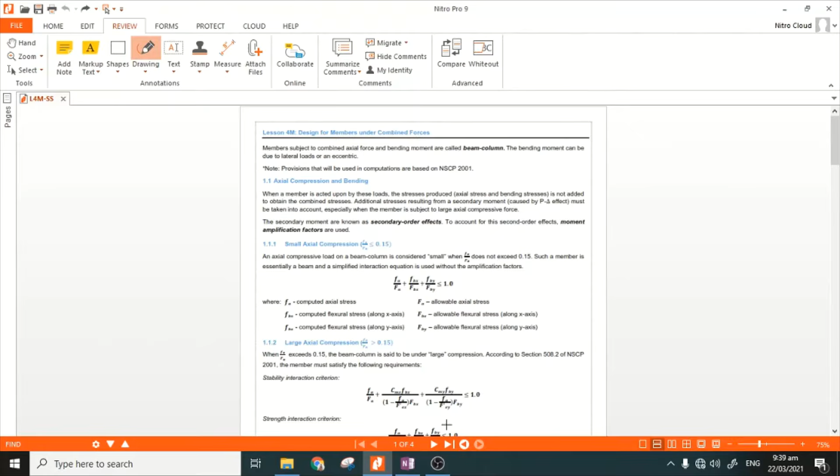Today I will discuss the design for members under combined forces. Members subject to combined axial force and bending moment are called beam columns.

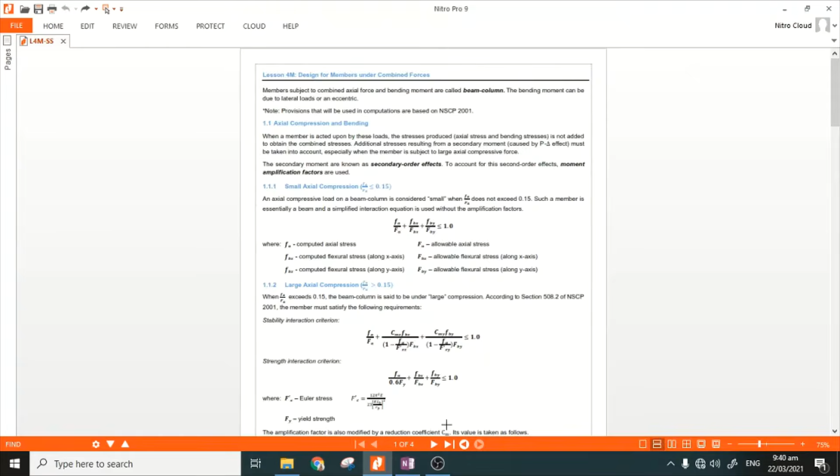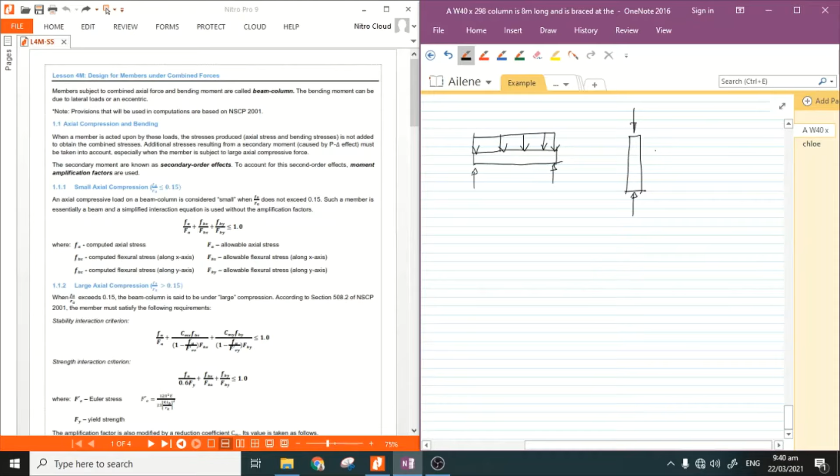As we know, we consider our structure as a beam when its purpose is to resist transverse loading, wherein that transverse loading causes the member to have bending moment and bending stress. And when the structure resists axial force, like compressive force, we call that structure a column.

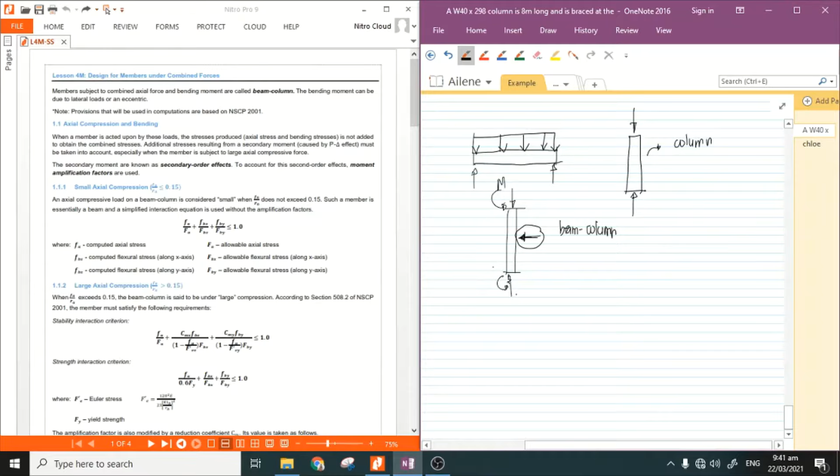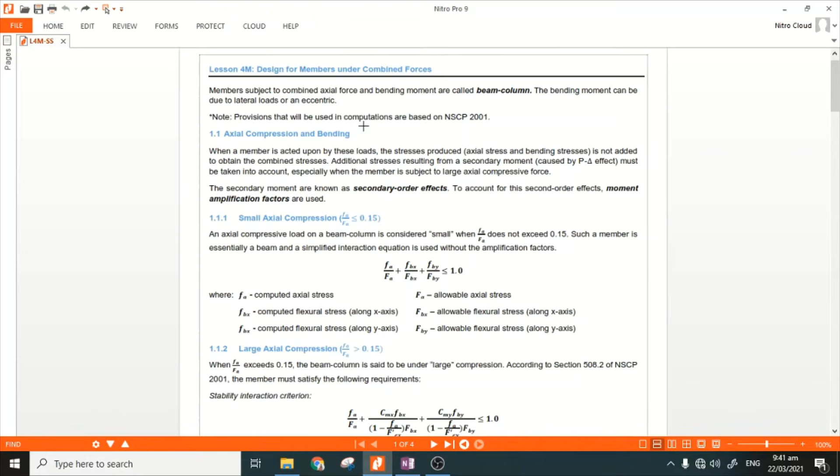The provisions we will use here are based on NSCP 2001. Let's start with axial compression and bending.

When a member is acted upon by these loads, the stresses produced—axial stress and bending stress—are not simply added to obtain the combined stress. Additional stresses resulting from a secondary moment caused by the P-delta effect must be taken into account, especially when the member is subject to large axial compressive force.

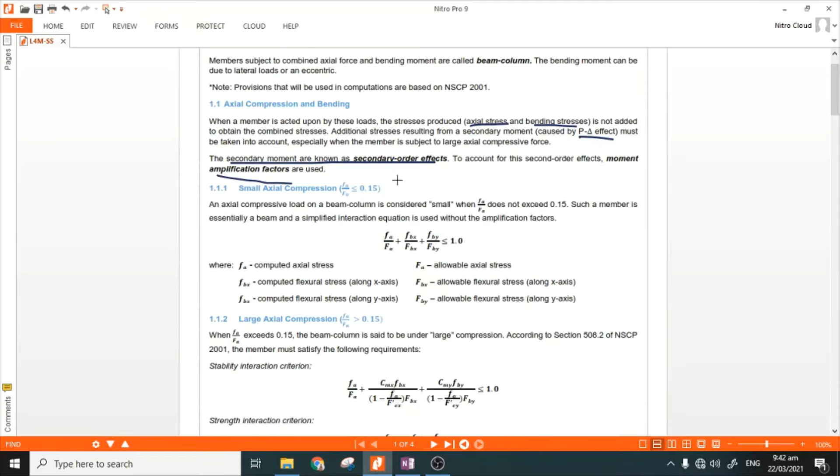So we don't just simply add the axial stress and the bending stress. We need to consider amplification factors to take into account the secondary moments.

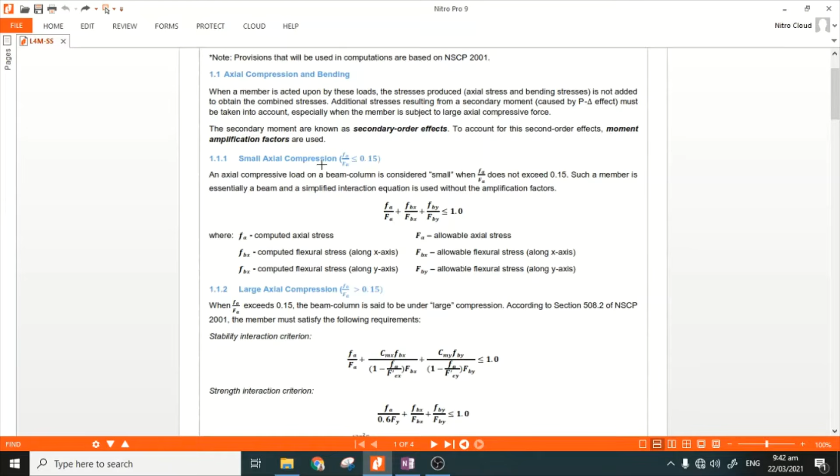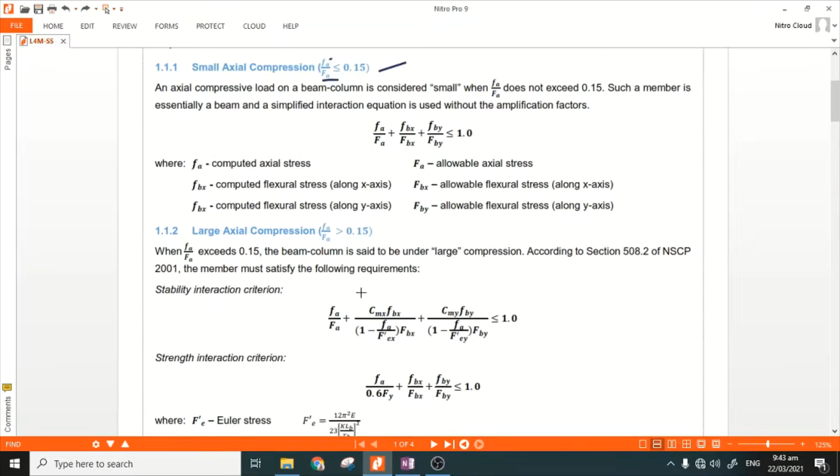We have two conditions here. First is the so-called small axial compression. We consider it small axial compression when the actual axial stress over the allowable axial stress is less than or equal to 0.15. That falls under this provision. However, if it's greater than 0.15, it falls under the other provision.

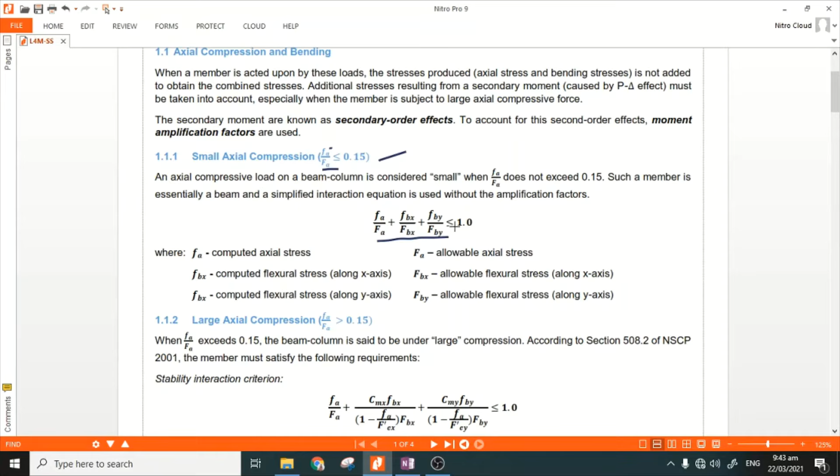Now for large axial compression, we have two criteria. The first criterion is the stability interaction criterion. Here is its formula.

If you notice, we now have additional variables: C sub mx and C sub my, and then F prime ex and F prime ey.

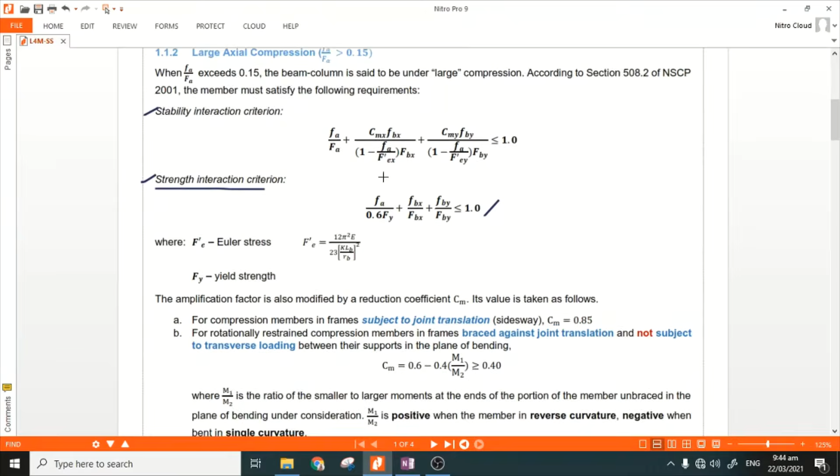And then for the strength interaction criterion, there is no C sub m, the reduction factor. So C sub m is called the amplification factor or the reduction coefficient.

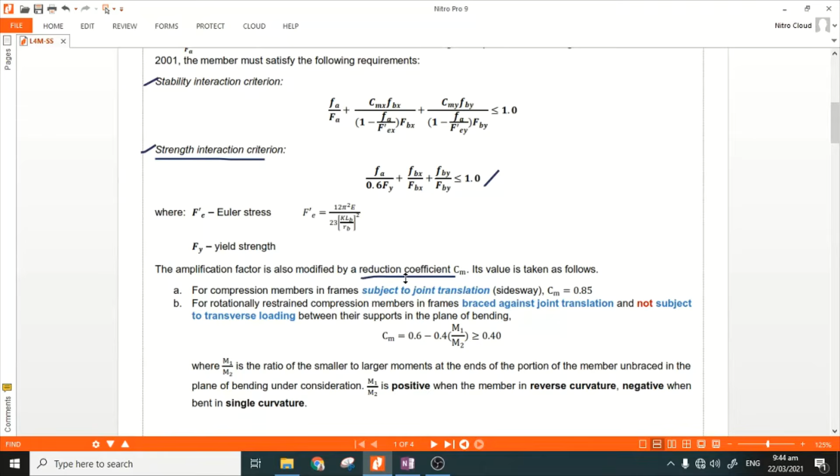These are the conditions—there are a few of them. There are three conditions for determining which value to use for the amplification factor. First, for compression members in frames subject to joint translation, C sub m is equal to 0.85. This means if your frame does not restrain the side sway, C sub m will be equal to 0.85.

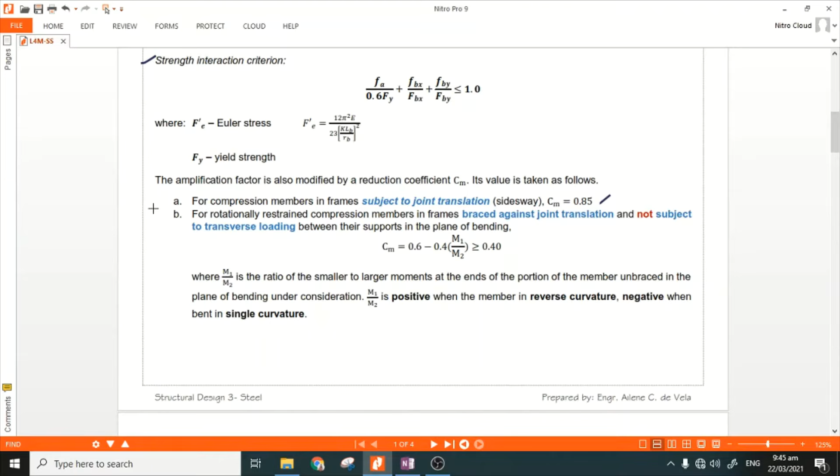Second condition: for rotationally restrained compression members in frames braced against joint translation—meaning it has bracing—but not subject to transverse loading, meaning it has no lateral loads.

C sub m is equal to 0.6 minus 0.4 multiplied by M sub 1 over M sub 2, and this value should be greater than or equal to 0.4, where M sub 1 over M sub 2 is the ratio of the smaller to larger moments at the ends of the portion of the member unbraced in the plane of bending under consideration.

This means the ratio you get will always be less than 1, since the numerator is the smaller moment and the denominator is the larger moment.

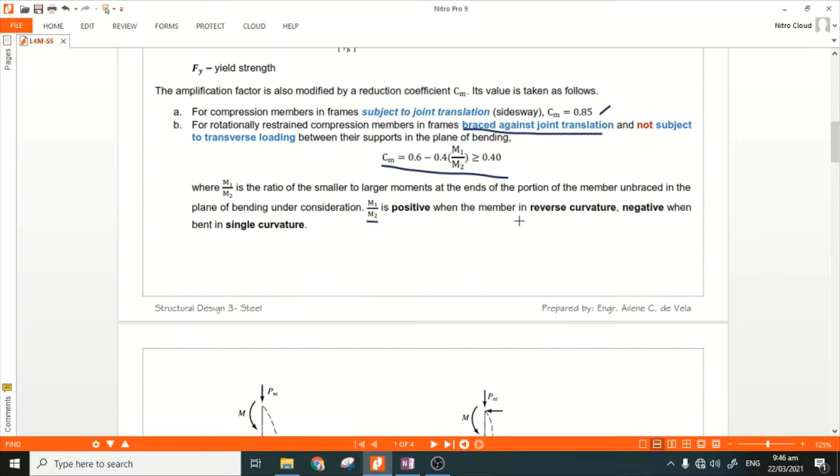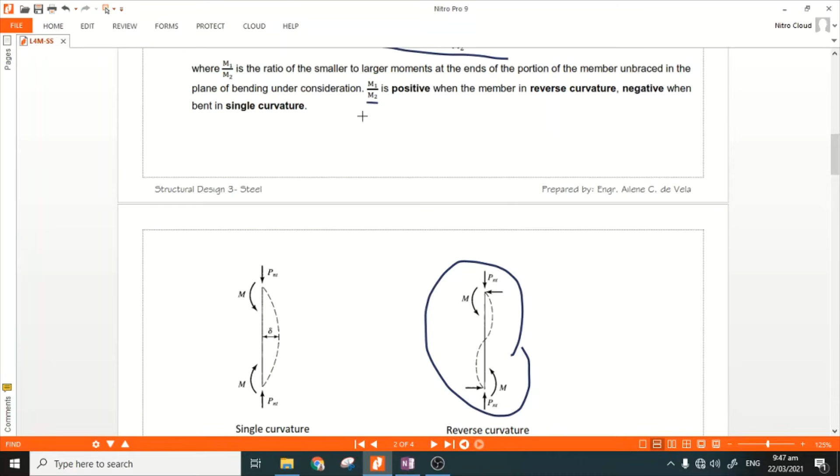M sub 1 over M sub 2 is positive when the member is in reverse curvature, like this shape of bending. It is negative when bent in single curvature. So when does single curvature and reverse curvature happen?

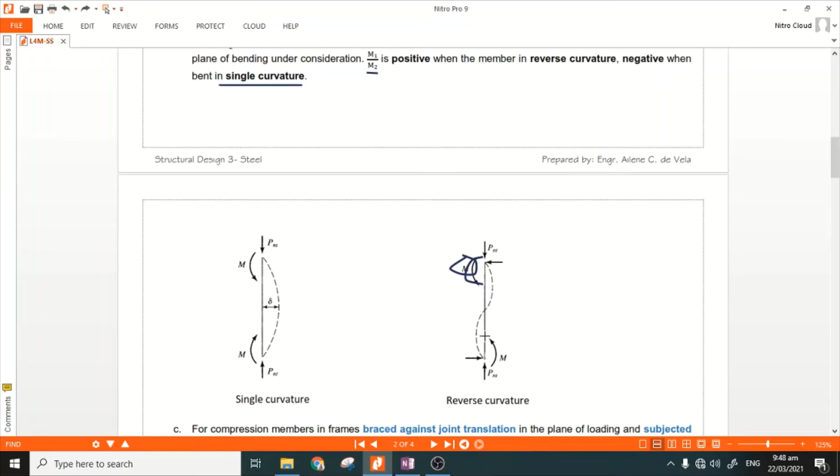For the third condition, it's still braced against translation, but now subjected to transverse loading between its supports. For members whose ends are restrained against rotation in the plane of bending, C sub m is equal to 0.85. When unrestrained against rotation, C sub m is automatically equal to 1.

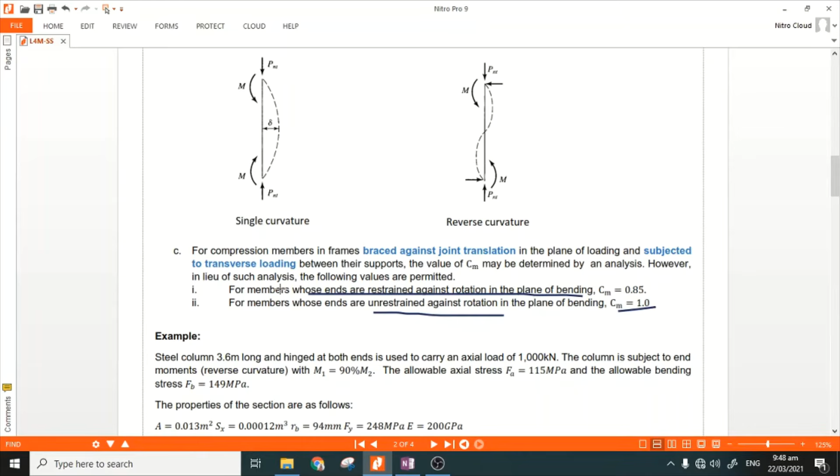Let's proceed to the example. A steel column 3.6 meters long, hinged at both ends, is used to carry an axial load of 1,000 kilonewtons. So we have a column hinged at both ends.

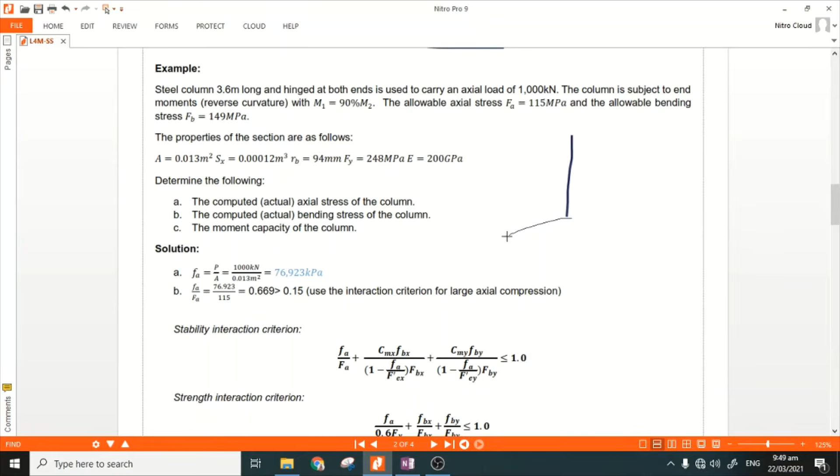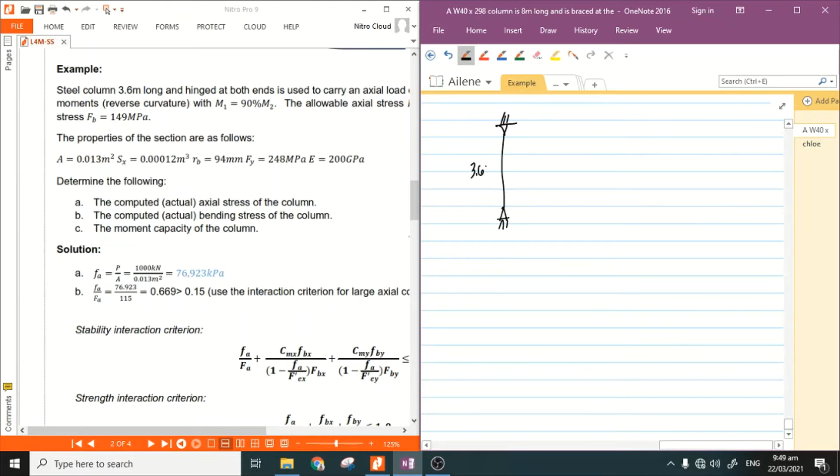And then 3.6 meters long. Tapos sabi dito, meron siyang axial load na 1,000 kilonewton. And then the column is subject to end moments, a reverse curvature with M1 is equal to

0.9, di ba yung 90% daw ng M2. Therefore, kung kukunin natin yung ratio ng M1 to M2, this is 0.9 M2 over M2. So, yung ratio niya is 0.9. So, mamaya magamit natin yan.

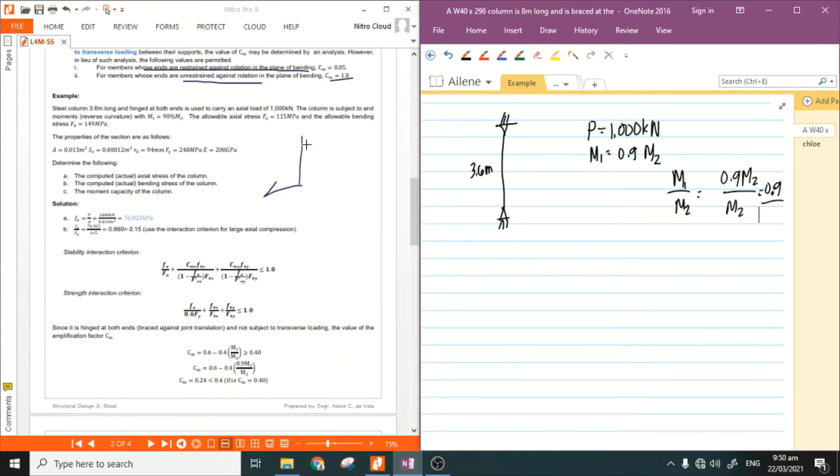The allowable axial stress, given na rin yung F sub A is equal to 115 MPa and the allowable bending stress is equal to 149 megapascal. So, both axes na to for X and Y axis.

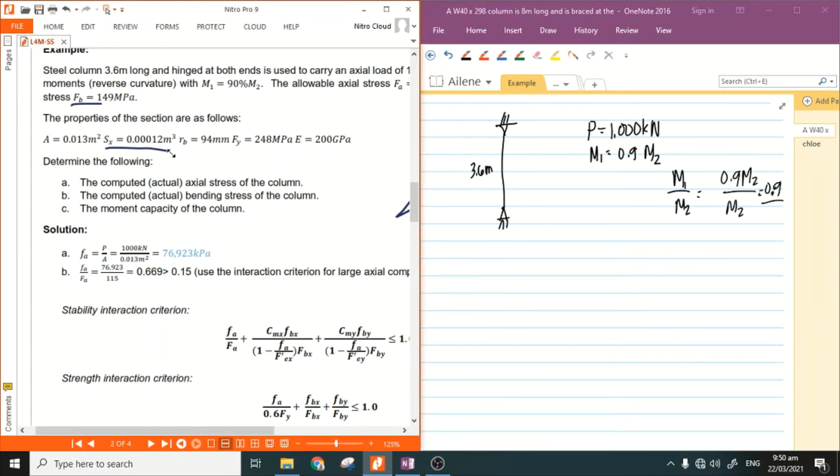The properties of the section are as follows. So, given na din yung area and then the section modulus, the radius of gyration, and the yield strength and modulus of elasticity.

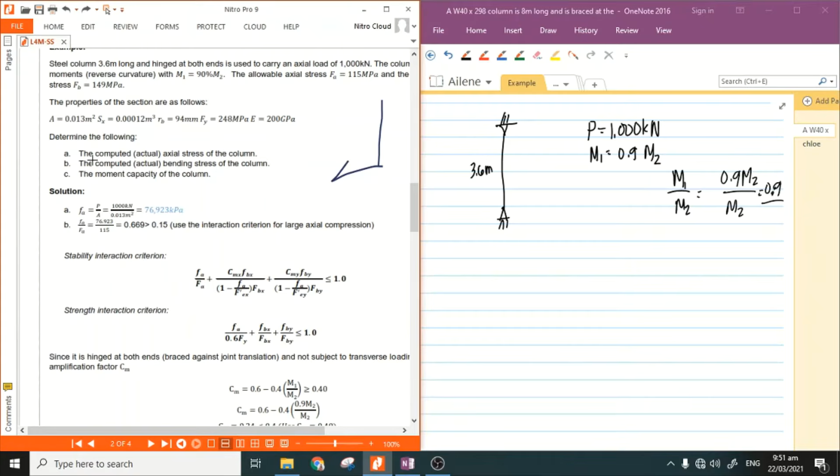So, ang tanong, determine the following. For letter A, the computed actual axial stress of the column.

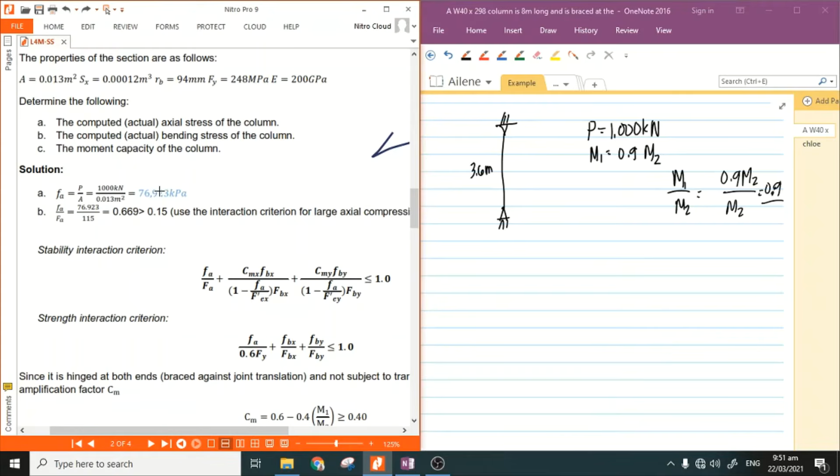So, para makuha yung actual axial stress niya, dinivide lang natin yung area, yung axial load by its area. So, we have 1,000 kilonewton divided by yung given na area na 0.013 squared meter. That is equal to

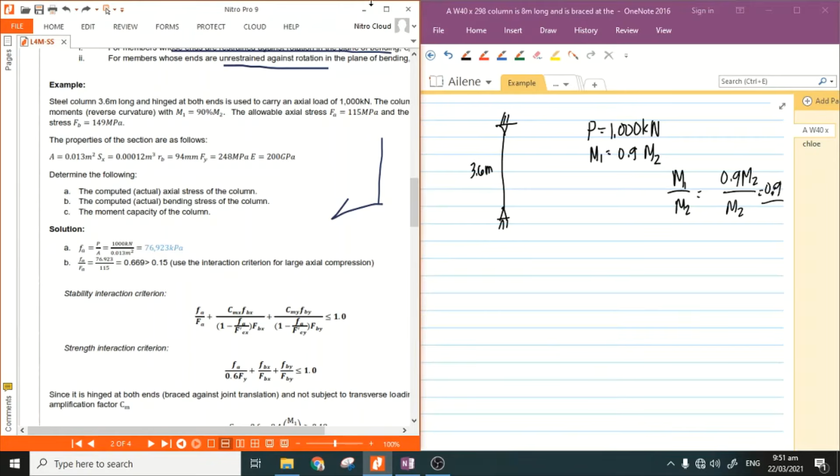76,923 kilopascal. So, para ma-identify natin kung siya ba ay pasok dun sa small or large axial compression, kunin natin yung ratio nung actual axial stress nung column versus nung sa allowable.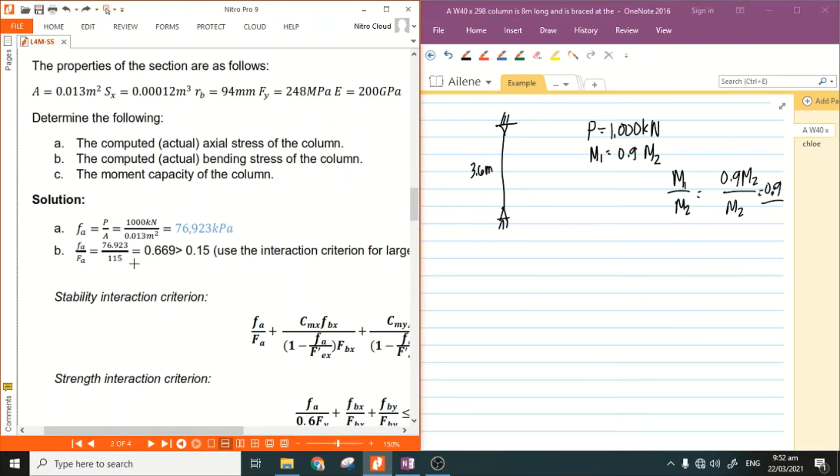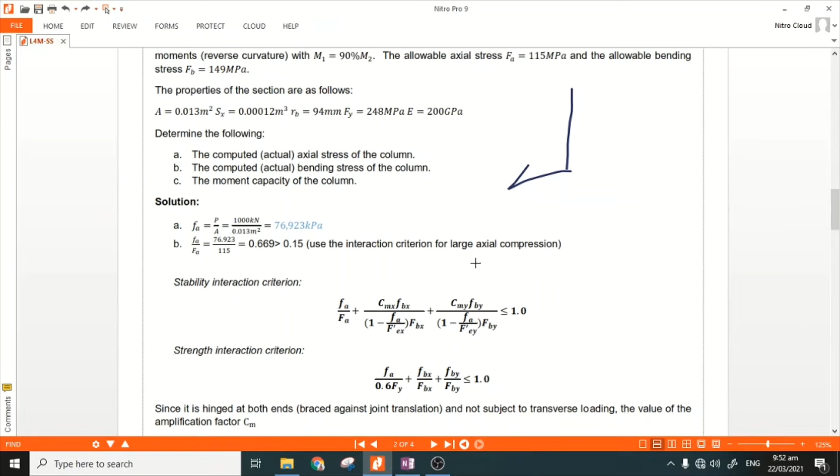76.92 divided by 115 is equal to 0.669. That is greater than 0.15. Therefore, we are going to use the criterion for large axial compression. So, ito yung mga formula niya, di ba?

So, unahin natin yung sa stability interaction criterion. Para magamit natin tong formula na to, una, meron na tayo nito, value nitong dalawa. So, ang wala na lang is yung sa C sub mx and then the value for F prime sub ex.

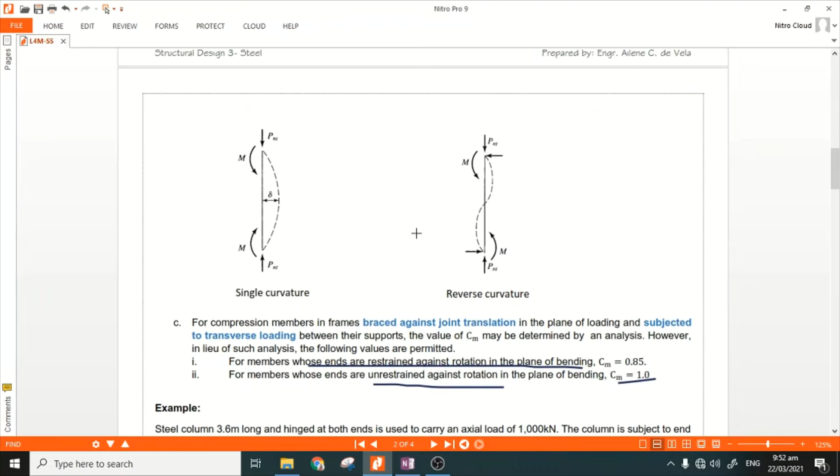Unahin natin yung sa C sub m. Para makuha natin yung value ng C sub m, sabi dito, hinge at both ends naman siya, so hindi siya pasok dito sa letter A. Malamang sa B siya papasok kasi braced siya against joint translation pero hindi siya subjected sa transverse loading.

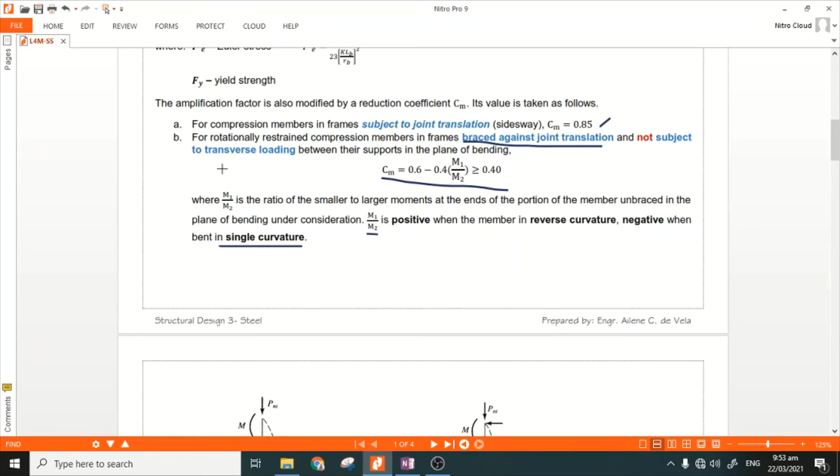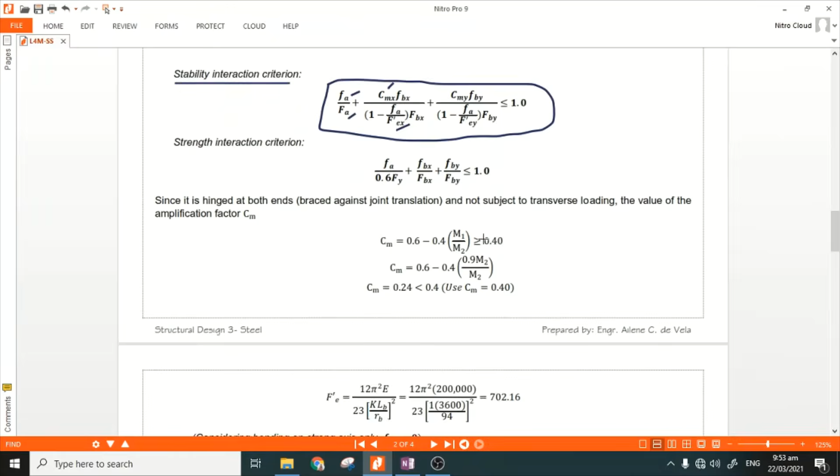So, ito yung formula natin. Ito na yon. Isa-substitute na natin yung C sub M. Yung para makuha pala yung sign nung para sa M sub 1 and M sub 2.

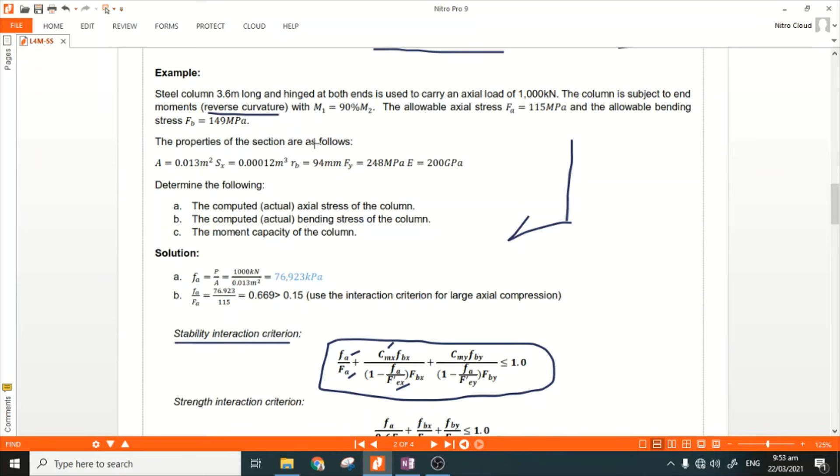So, may nakalagay dito na reverse curvature. Indicated na dun sa problem na siya ay reverse curvature. Therefore, positive yung ratio na gagamitin natin ng M sub 1 at M sub 2.

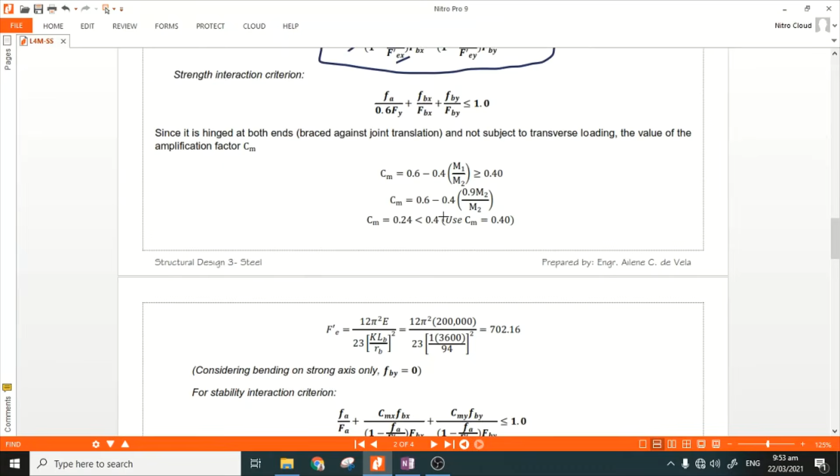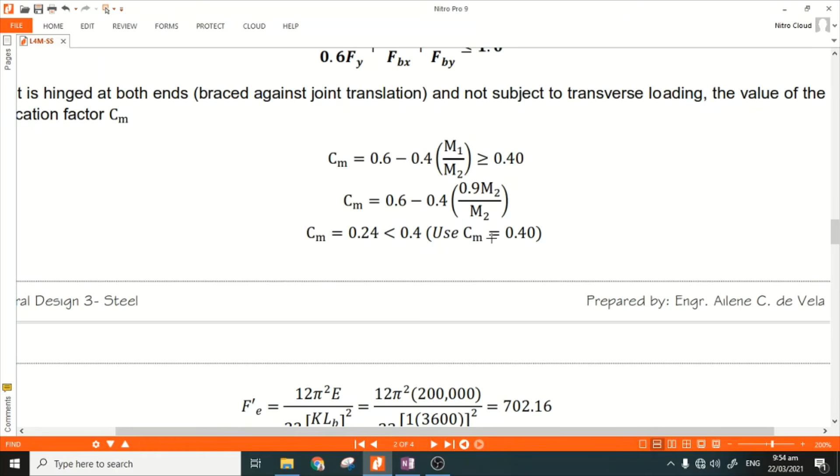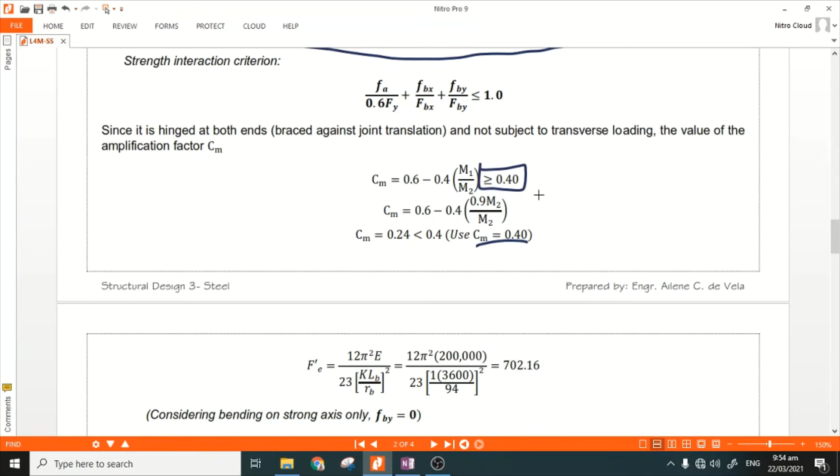So, substituting the values, we have 0.6 minus 0.4 multiplied by 0.9. That is equal to 0.24. Since less than 0.4 siya, ang gagamitin pa rin natin ng value ng C sub M is 0.4 kasi andun sa condition na dapat C sub M is should be greater than or equal to 0.4. So, meron na tayong C sub M.

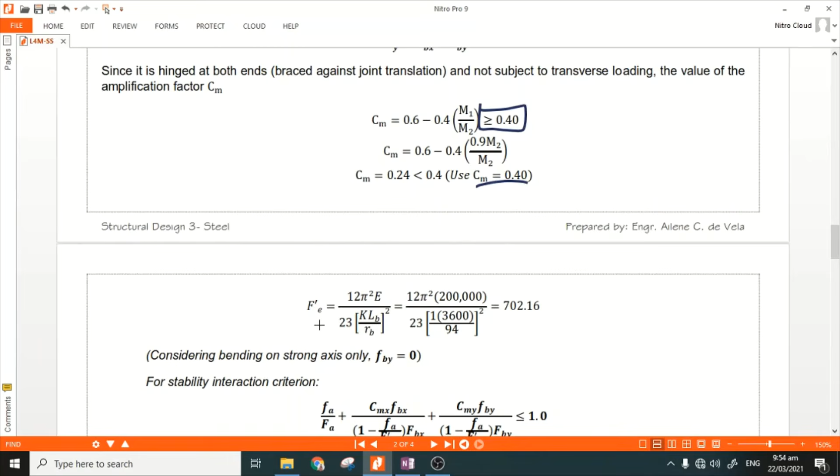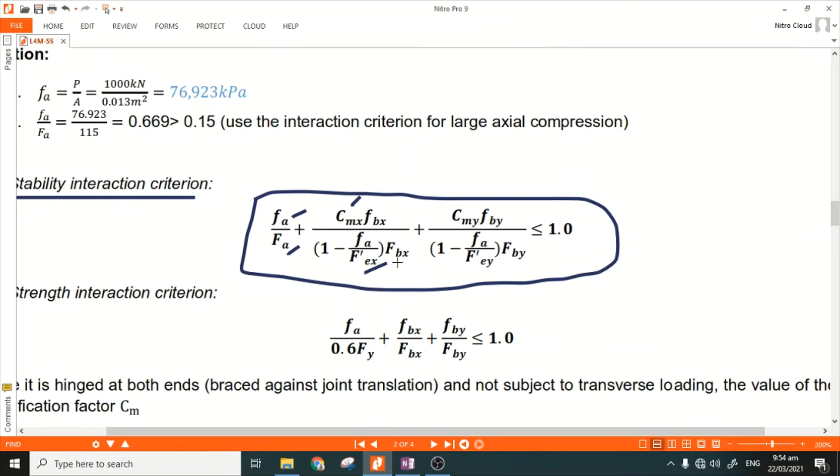Kunin naman natin yung F prime E. Kung mapapansin nyo dito, di ba yung formula natin is for X and Y. Since mapapansin ninyo, isa lang yung binigay niyang allowable bending stress, isa lang yung ano niya, yung binigay niya ring R sub B or the radius of gyration.

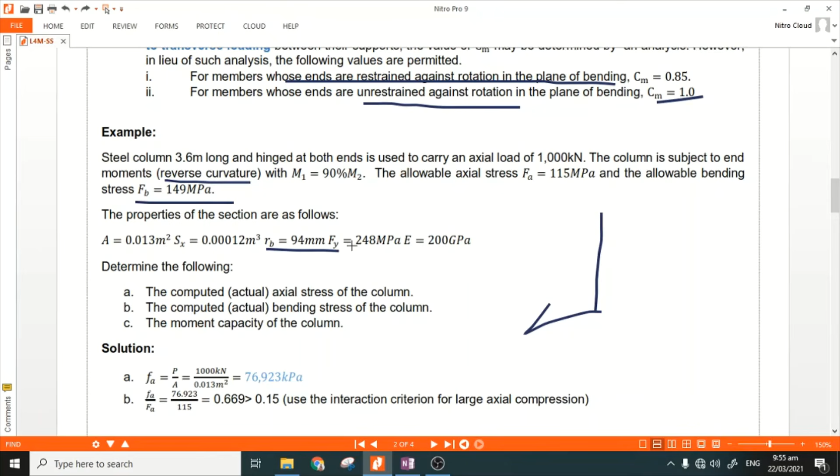Therefore ito na yung ano niya, yung governing value. Kino-compare natin yung value ng radius of gyration ng x and y. So, kunwari, siguro ang assumption dito is along one axis lang siya ano, isang axis lang yung merong bending, ano.

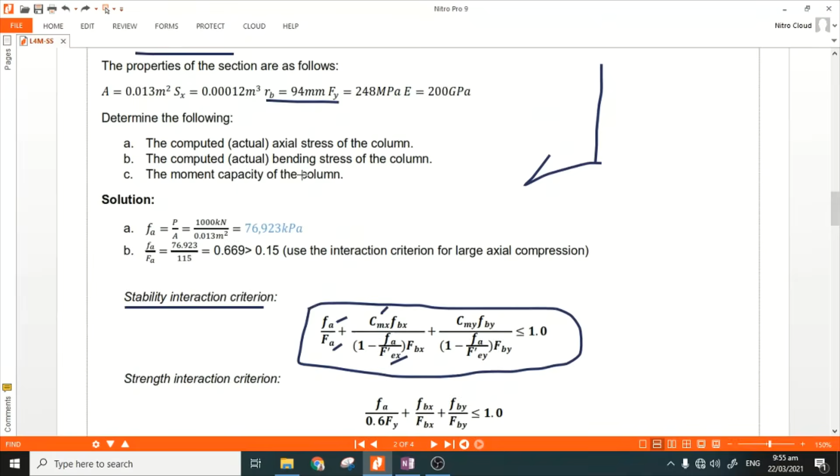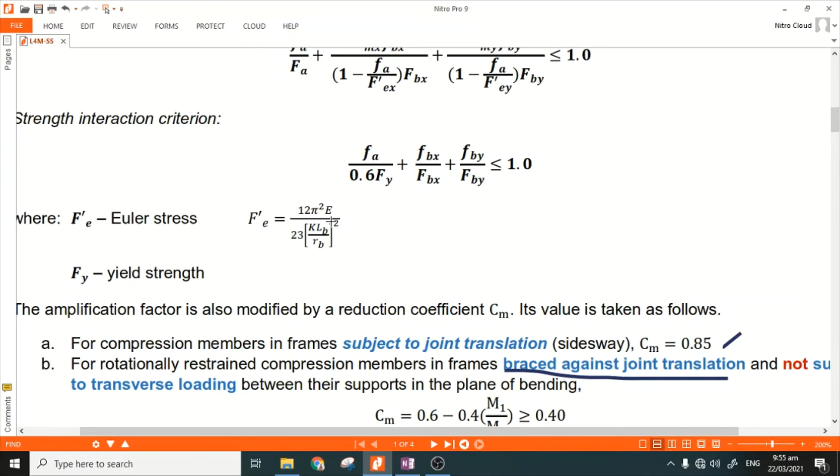So, binigay naman na niya yung radius of gyration. So, substitute lang natin, ano. So, yung formula for F sub E is given na din dito sa taas. We have F sub E, F prime E is equal to 12 pi squared E all over 23 multiplied by KLB over R sub B.

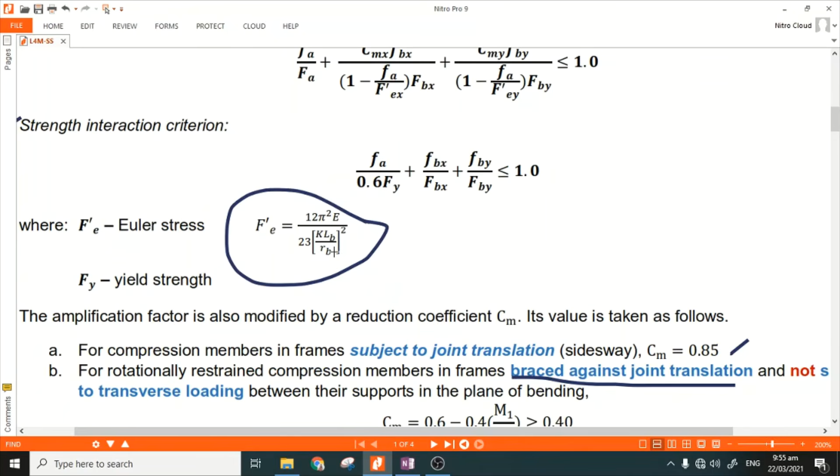So, kung mapapansin nyo, ito lang din yung Euler critical stress. Ano? Itong KL over R is the governing slenderness ratio natin dati.

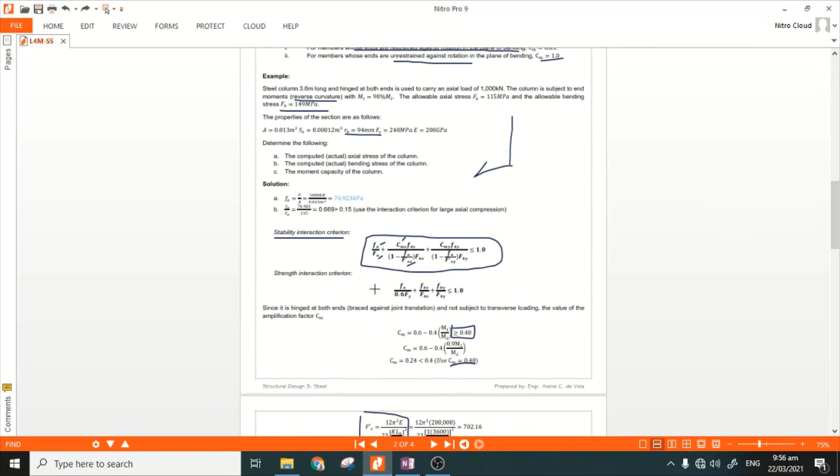So, balik tayo doon. Substitute lang natin ulit yung mga given. So, we have F prime E is equal to 702.16. So, considering bending on strong axis only, F sub BY is equal to 0.

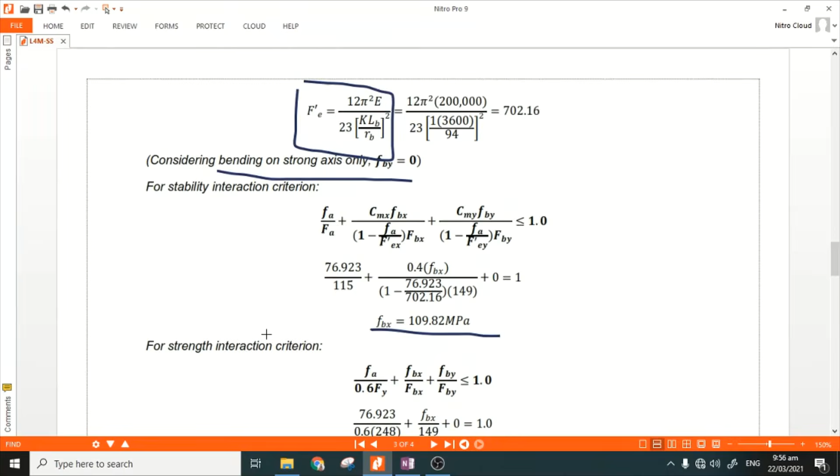Andito na pala, ano. So, for stability interaction criterion, ito na yung naging value nung bending stress along the strong axis. So, doon naman tayo sa strength interaction criterion.

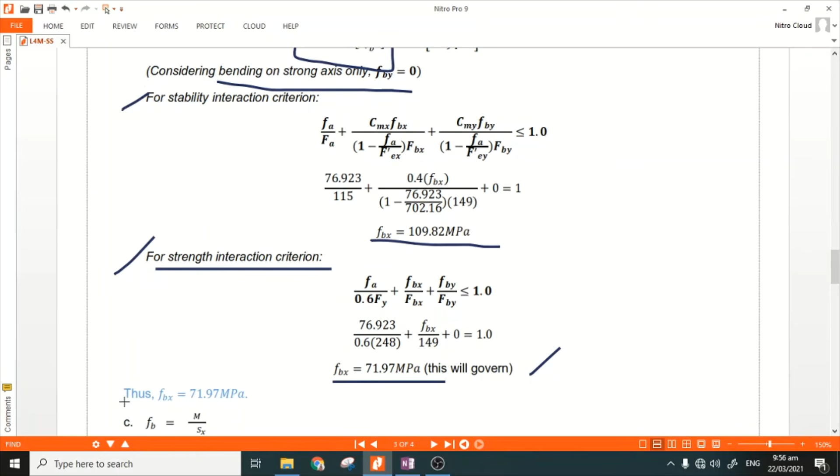So, ayan, may nakuha din tayong value doon nung bending stress. Ano? So, ang gagawin natin, di ba dalawa yung criterion, ipagko-compare natin. Kung alin yung mas mababa, yun yung mag-govern. Ano? So, thus the actual bending stress is 71.97. Ano, yun yung hinahanap natin dito, the actual bending stress of the column.

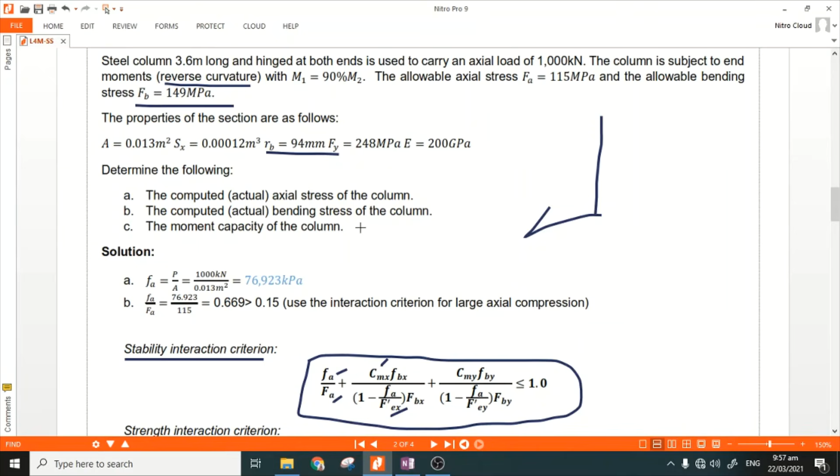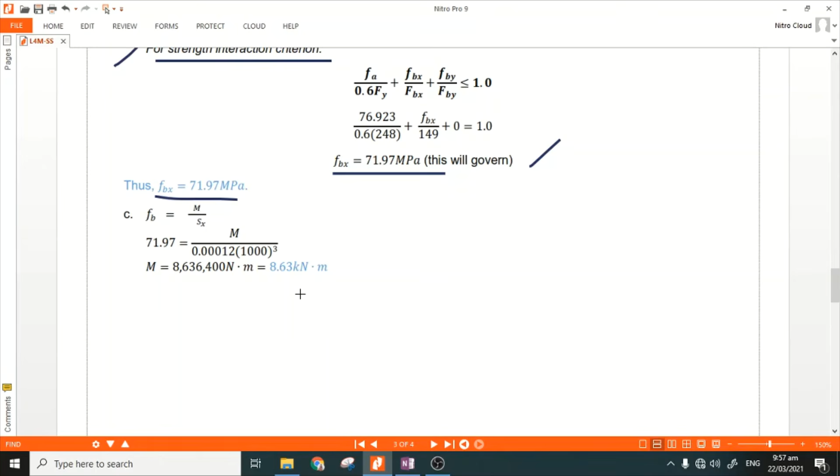And pagdating naman dun sa moment capacity of the column, so yung na-compute nating actual bending stress niya na 71.97, i-equate lang natin dun sa bending stress formula natin. That is equal to M over the section modulus. So, the capacity nung column natin is 8.63 kilonewton meter. So, ganun lang yung sa combined stress natin, ano. That's all. Thank you.